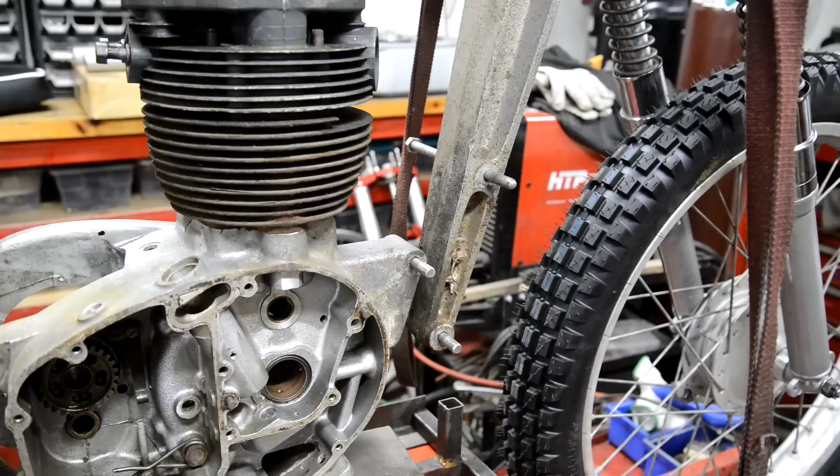So as you know, the bottom ends, cases and everything on the unit singles are all the same size - 250, 350, 441, 500. So what I've done is I've looked at Jensen's 250, which is still in at least the cradle part of the BSA frame, modified. So where they put that engine to get it all nice and centered, hopefully reasonable for the weight, is this side of the front mounting is half an inch from the center line. Nearest - I mean, it's difficult to get center line on a round tube with a bike that's all built up, but as far as I can tell, it's half an inch.

So what we're going to do is, that actually needs to come across this way, which is going to make that chain line worse. Bugger. So I'll make sure, because there's a nice casting mark more or less exactly down the centre here - they must have cast this in two halves. Well, they would have done, yeah, because of the shape of it, releasing and all that sort of stuff. Things have got to be sloped in a casting. If you were to cast a cube, you couldn't just cast a cube, or it wouldn't come out. It has to have a slight - there's a name for it - a slight angle on it, so that when you pull it out, the bigger end comes out and the smaller end is following it.

In fact, let me do that. Let me measure it and find a bit of cardboard. Right, so I got my measurements made. The long side is 5 3/4. I know my hand's in the way, but I'll be helped. 5 3/4. Then from the top one on the frame down to the one on the engine is 3 3/4.

Go the right way, Michael. Okay, so draw that, and then from that one to the one at the bottom is 2 7/8.

There we go. So right there is the mounting on the engine. So let me go and punch these three out, and actually I'll be honest with you, I've already punched them.

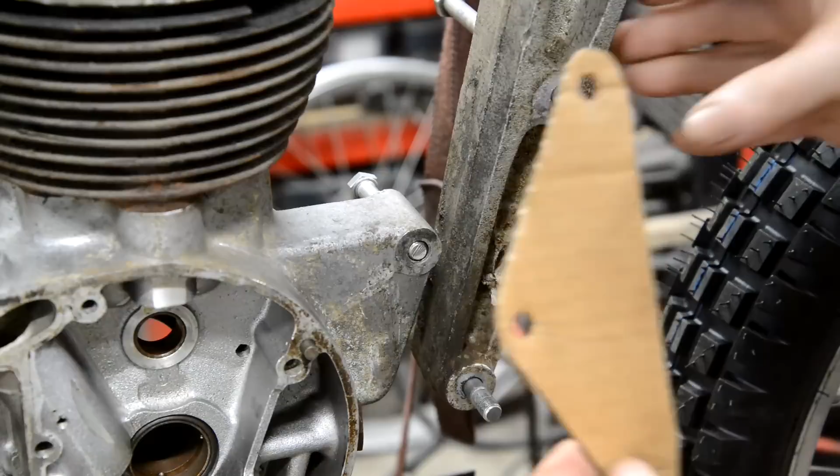Right, so that goes on there, that goes on there, and hopefully that goes there.

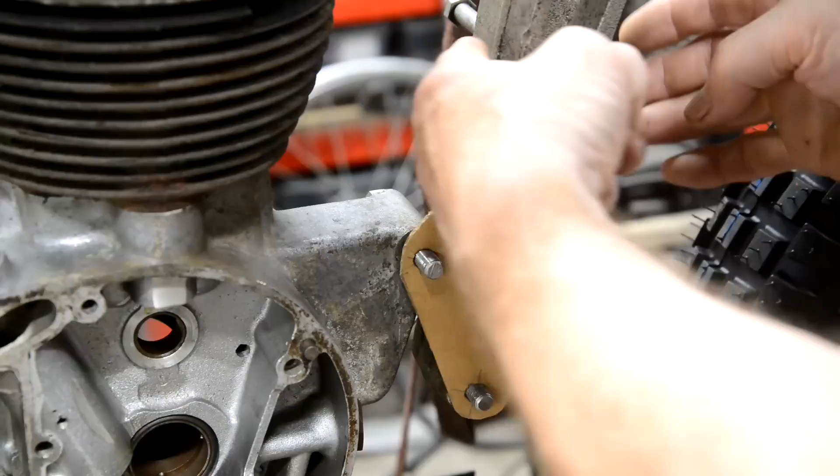So now we'll transfer this to a couple of plates of alloy, cut them out, then we'll put the engine where we want it to be and make some spacers, because don't forget, here is wider than there. Actually, I should have the original spacer for that somewhere - it'll be in the little box of Greeves things, because when I press that flat, that's going to be out a bit at the bottom here, so we're going to have a reasonable size spacer to go in there.

And as I say, I think, let me pull you out. There's enough room here that the bottom and the back can be fixed. I can lift that up, pull it forward slightly, and it'll come out easily, rather than trying to go to all this bother at the back.

Right, so let me go and find some. Oh, have I got any 1/4 inch alloy plate? I'd like to use 1/4 inch. I know I've got 3/16. Let me go and have a look. Let me go and cut 2 plates, and then we'll see about marking this up to get this back one in. Then we're going to make sure we're going to keep the engine straight.

So what I can do then is put a straight edge across this case and measure into the centre line on both sides, and I'll show you how I'm going to mark the centre line on a round piece of tube in a minute.

Now I'm going to move you around so you can see how I'll do the mark on the back tube. Now actually this is a 3-handed job, but I can at least show you how I'm going to do it.

Alright, so how do you get a measurement in the centre? Even if you use a pair of calipers, you don't know if you've come round slightly one way or the other. So what we're going to do is, this tube of course is one piece, so we're lucky here - that's exactly the same diameter as that. So if we put a straight edge across, or if I do it that way for you to see, we know that this edge here is exactly on the outside of that tube. So that's what I want to do this side.

I can then measure across there, mark my 3/4 inch, just move this, do the same there, mark my 3/4 inch, and then draw a line. As I say, I'm going to be a bit cack-handed doing this - I might have to tape it up or something, so let me do that.

Well, things are looking a little better. Got that 1/2 inch over from that line. Put my straight edge across the cases, measured from there to the straight edge - that engine is exactly straight in the frame.

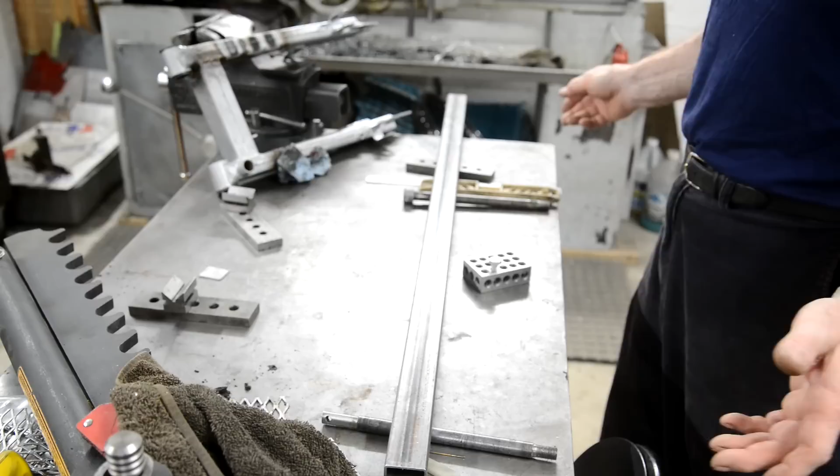Alright, the world is winding me up. My metal supply doesn't have any quarter inch alloy, 6061. So I'll order it from McMaster this afternoon and it'll be here tomorrow afternoon. And I don't want to start on the swinging arm because I want to know whether... anyway, everything is coming together to be a complete pain.

Right, so what I'm going to do is I'm going to start cutting all the pieces to make the swinging arm. And what I'm going to do is I'm going to take these suspension mounts off here and these fork ends off and use them. That will at least save us a little bit of time.

As I said, this is what I used for the Enfield swinging arm, which is a lot bigger, heavier bike than this is going to be, and that was held up for what - a year and a half. It's been ridden a lot. So let me take some measurements off this one, start cutting this. I'll decide how I'm going to do that.

So I've got to make some measurements. Then I'll order the alloy and I'll see about some tube and stuff for that. Okay, so let me get stuck in measuring, and we'll just do what we can when we can.

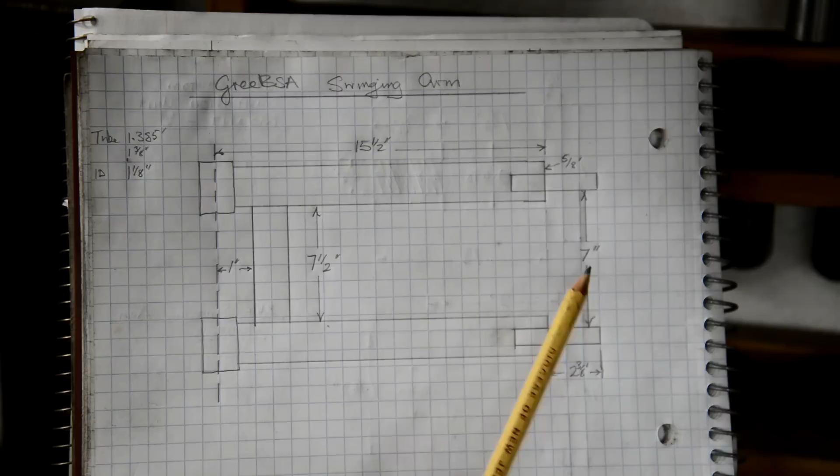So there's a drawing of the swinging arm, and no, your eyes do not deceive you - that wider measurement does say 7 and that does say 7.5. I'll explain why in a second. Anyway, the really important thing is these are parallel.

On the Greeves swinging arm, I went and measured the other one because there's nothing wrong with that, and they are parallel. So that is 9 inches wide on the Greeves one.

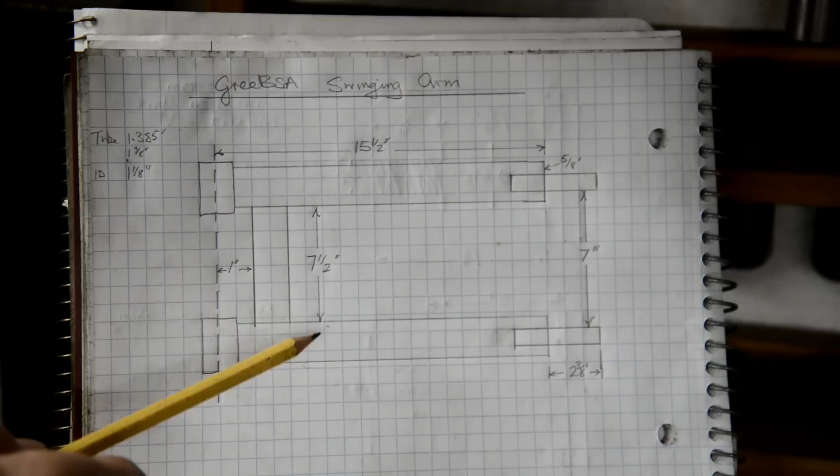This is wider than the material I'm going to use, so I'm going to use 3/4 inch there. As I say, I've used it before, so don't worry about it - 1.5 by 3/4. So if that's 9 inches, 2 times 3/4 of 1.5, 1.5 of 9 is 7.5.

The distance between the forks on the Greeves is 7 inches. But of course, as I say, this is an inch, something like that, 1.1 inches, so that would get that down to just below 7. These are barely inside of this. Alright, but as I say, the important thing is the parallel.

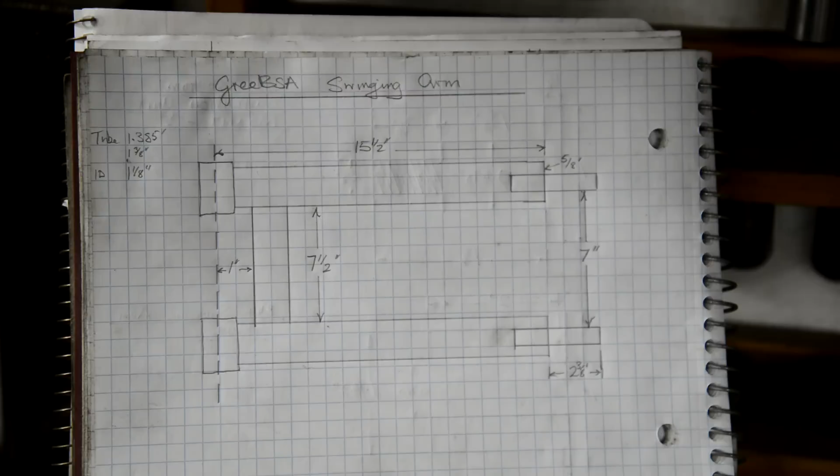So we're going to make this out of 1.5 inches by 3/4. We're going to cut them out of the existing swinging arm and just use them. So I've just measured how long they go in, from the center of the pivot to the end of the actual arm. It's 15.5 inches.

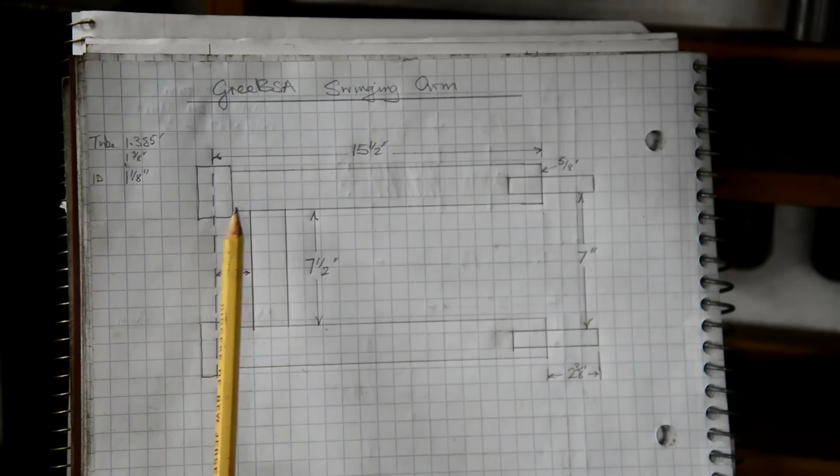This is basically 1 3/8 inch 1/8 inch wall, and I've got some 1 3/8 inch 1/8 inch wall tube. So I've got that, I've got this - that is inch by inch, or 1 inch square box section. I have some of that as well. So I've got everything I need to make this relatively quickly.

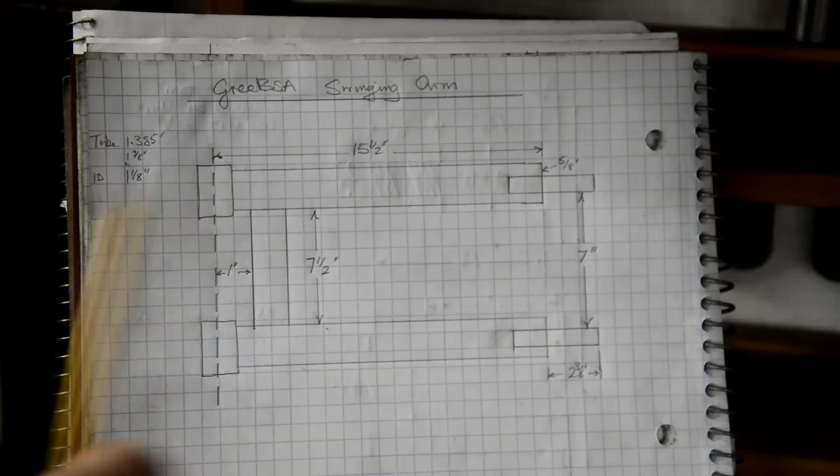So this might turn out to be this week's project actually. I think I'm going to trundle down and order the alloy plate, but also trundle down to Mike's first thing in the morning, pick up that other wheel, see if it's a better wheel. And if it doesn't need anything doing to it, I can actually put the tire and tube on. But that all depends on how things are, whether I decide I need to move the wheel about inside there. But as I say, the big thing is they're parallel.

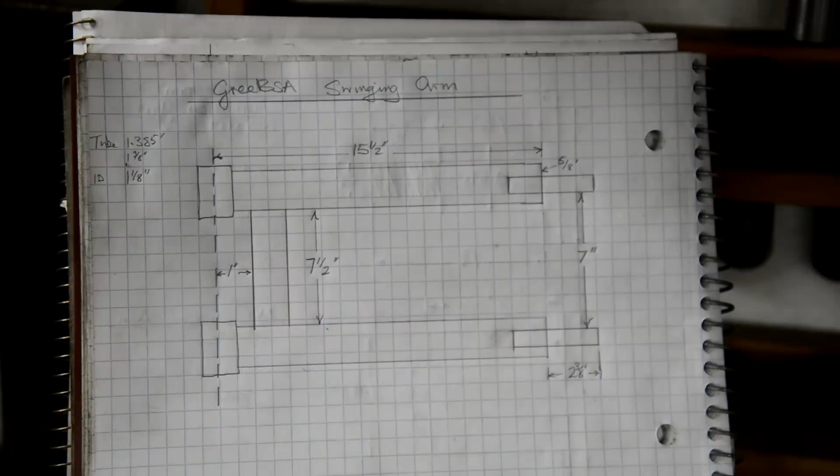I don't have to start worrying about angles - the angle that this goes up to that tube, and if that bends out like that, then they need to be at an angle. So everything can be made quite easily. So let me start sawing some box section, or as they call it here, square tube, even when it's not square, such as these are.

Alright, new day and a new job. It's done nothing but rain since I spoke to you yesterday.

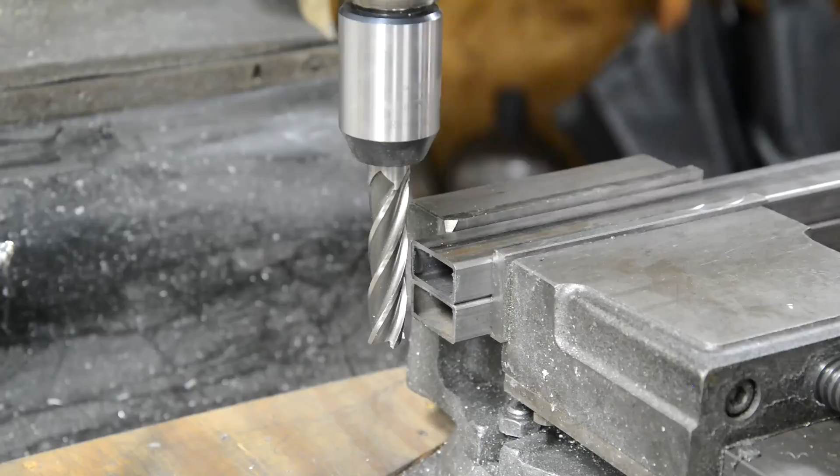Okay, I've cut my 2 pieces just slightly longer than whatever it was I wanted - 15, where did I say it was - 15.5 inches, hopefully. A bit much if I screwed up before we even got started. Yeah, it's 15 and 5/8.

So what we're going to do is mill the end, turn it round and mill the other end so these are absolutely the same length. Then the next step will be, while it's still in here like this, a 1.5 inch hole saw.

To put the cope into that for the piece of round tube. Oh, and speaking of the round tube for there, just a moment ago before I switched you on, I was able to get those out of there. Well, the heat affected that there, look - not much. So at least I don't have to make those up.

Although what I might do is cut that to be the same size as that and might as well get them centered properly. Alright, so let me just run this across the end of here.

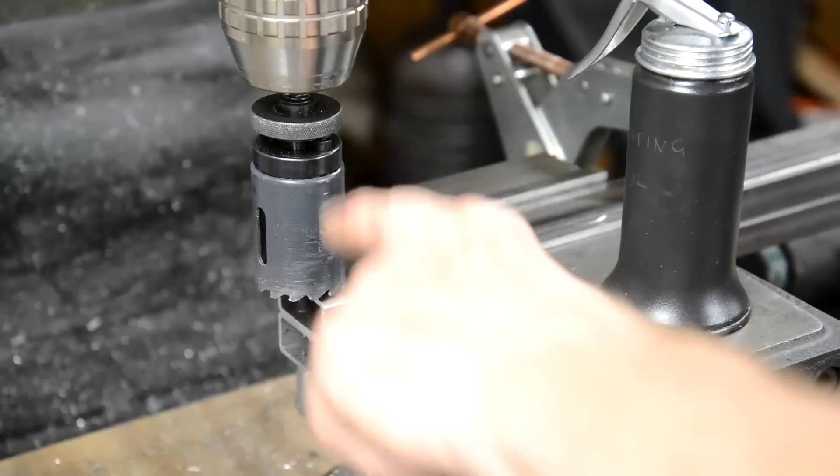So I need to buy a new one of these. It's a bit blunt, so we will take it slow and with plenty of lube. I had that clamped as well, by the way, so it didn't move. So let's see.

And I took the drill bit out so I could get centre.

I thought that was the thing that broke off. It's the piece we've cut out. Oh, that was nasty for a minute.

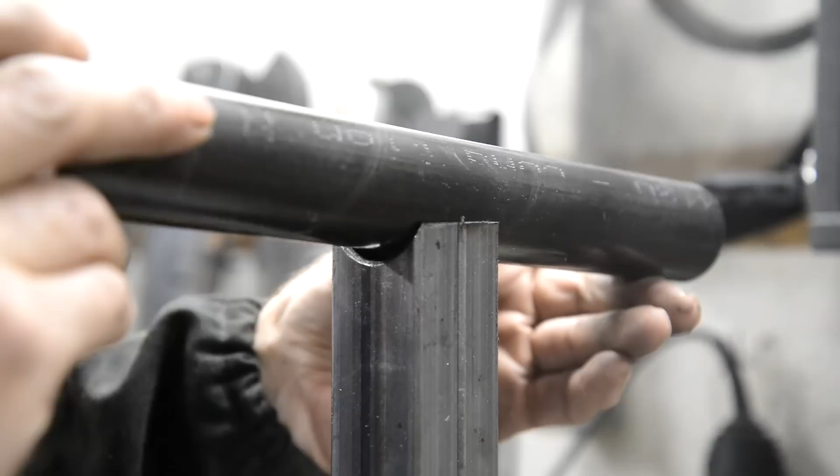Needs very slightly massaging to get that to go down in there. I suppose that's the problem with using just an ordinary hole saw - it's not going to be exactly right. In fact, I've got to measure this. Maybe this isn't exactly 1.5 inches. Turn that a little bit.

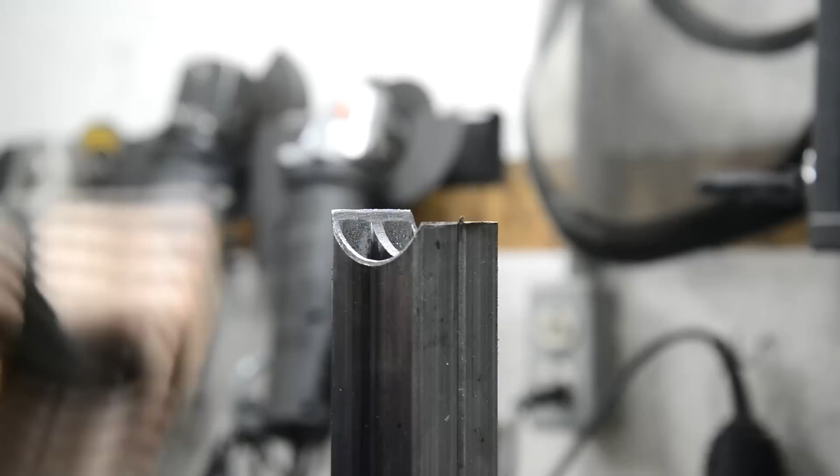Anyway, the next thing I'm going to do, hold on, is I'm going to cut these out of here. While I've got the thing over here, I'll cut the suspension mounts off as well.

And these are 3/16 for some reason. Why they didn't make them 1/4 inch, I don't know. So I'm going to have to fiddle on a little bit to do the slots. I think the 3/16. Yes, they are.

Okay, so let me get these out and then we'll set up with the new arms to mill these slots in.

Now that's all those pieces cut off. They were bronzed on. I've got to get all that bronze off. These are welded in, and look, they're not even solid plates. And the other thing, they look nasty.

When I cut through the end, a load of black water came out. So they still had water in, and I had a little look up inside. They look horrible. So yeah, should never have tried to salvage it.

Okay, so these, as I say, have all got to be sanded. I couldn't get that - I'll be able to get that out now probably, the adjuster Allen bolt out that the little snail cam snubs up to. And as I say, they'll have to be sanded off, get all that bronze off so the new bronze will take well.

Alright, let me set up now to do the slots for these.

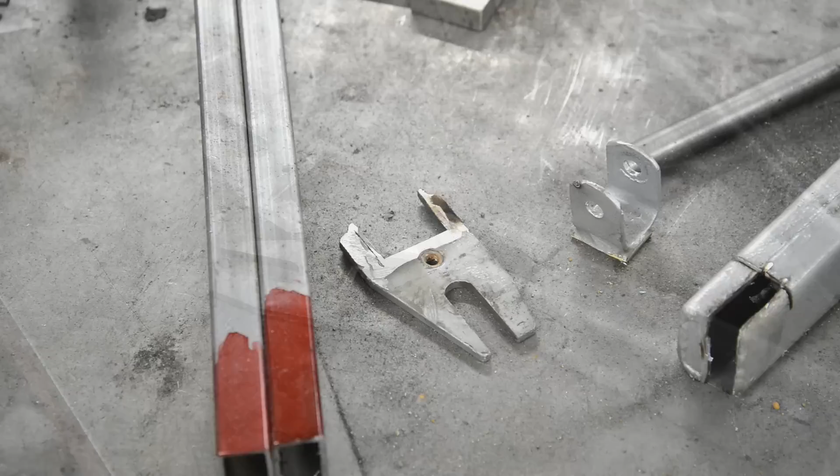Alright, own up. Who's got my calipers? Okay, I've been working to get them cleaned up. Put some stuff on there so I can mark it, and now I can't find my calipers to do the measurements and the marking. Plus, there's a Ronnie Dio song,

Can't remember which one it is. Some of the words are, it's like broken glass, you get cut before you see it.

And before I had a chance to sand the ends of those, I cut my thumb.

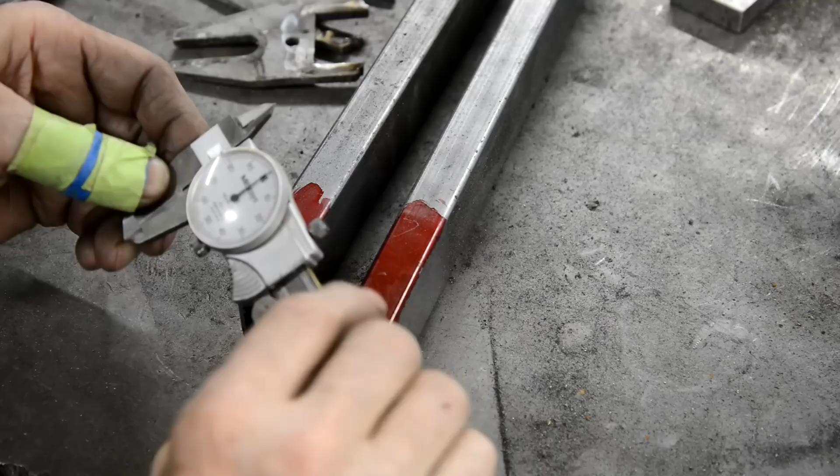Alright, let me keep looking for the calipers. Right, well, that's amazing. I can't find them anywhere. So we're going to have to do a phrase I hate - we're going to have to go old school. Not too bad. At least it's not a vernier. So I've got these, a nice Mitutoyo.

Okay, so let's get an averagey sort of reading. About 92, 0.192, 3/16 as I say.

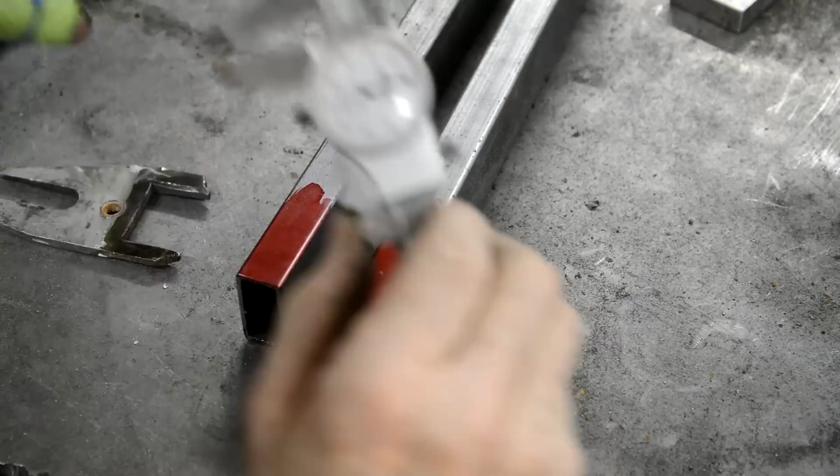These are slightly bent, you know. Yeah, 0.190. That needs sanding down a little bit. Yeah, 190, 192. Alright, so I'm going to measure these and then we'll mark them to put that thickness in the center. Alright, so let me do that.

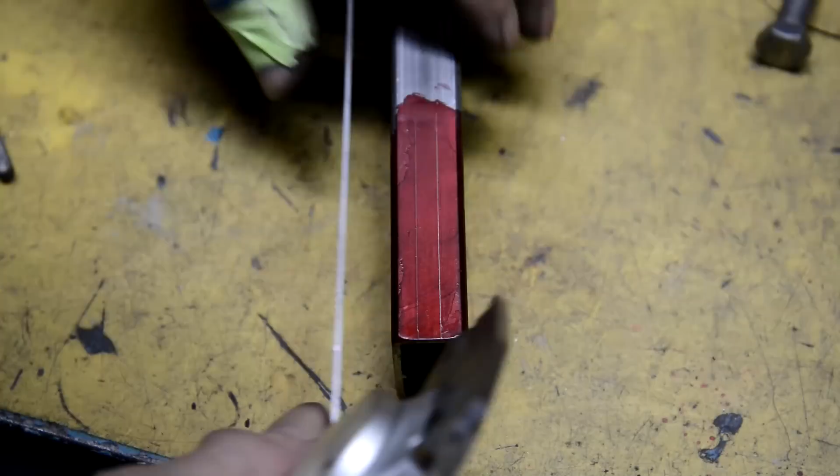Right, I've got my markings on. I actually had to do them twice because with this having a curved edge, to get a face to run this along, it pulled this around. So when I actually measured the gap in the middle, it was too big. So what I did was, I put that there like that to give myself a nice flat surface. Added the thickness of that to my measurement and used that to go along. Okay.

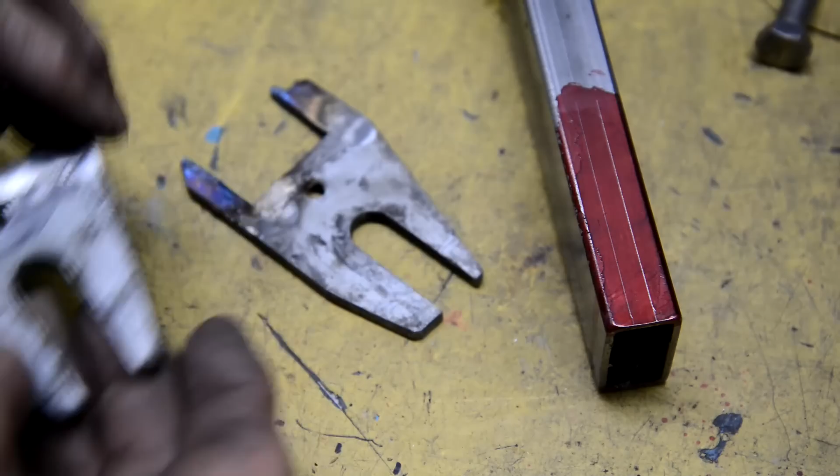So there I was, pleased with that. You know, I thought, wow, actually got it accurate. And then look at this. These two are completely bloody different. It doesn't matter which way I put them. Look. All over the place.

So we're going to have to fix up something to hold these, because I can't just drop one in there and drop one in there and say okay that's it. Because they're going to be different - the slot for that is going to be different on the two sides.

Alright, anyway that's a problem for after lunch. And actually the UPS man has just been with my 1/4 inch alloy. So just to cheer us up a bit, I might cut that and drill it this afternoon. We'll see.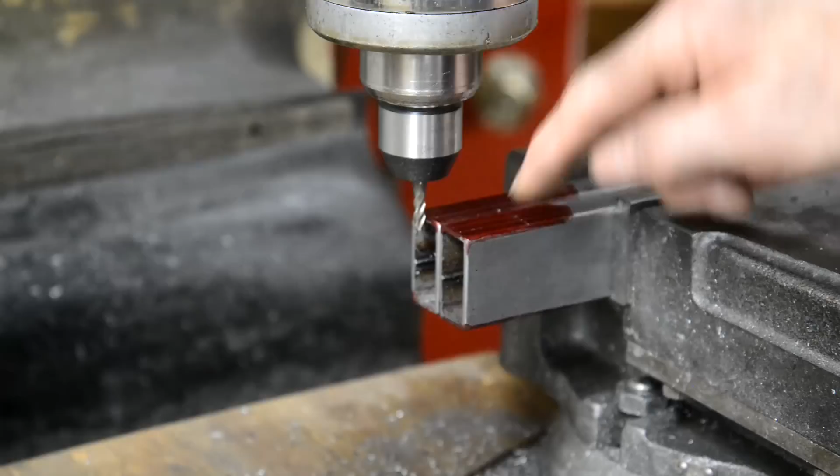Right, so here we are set up to do the first slot. I'm going to do 2 slots. I've got the DRO set to 0, as far as I want to go, so I can just go back. This is why it would have been nice if the plate was 1/4 - I could have just put a 1/4 inch end mill in and done the job easily, but of course I don't have that, well it isn't even really 3/16, so I got it marked. This is a 5/32, so that's 2 5/16. So let's see if we can do this without breaking the end mill.

I hate using small end mills. So it'll take me forever. If I knew what I was doing, I'd know how fast a feed I could use.

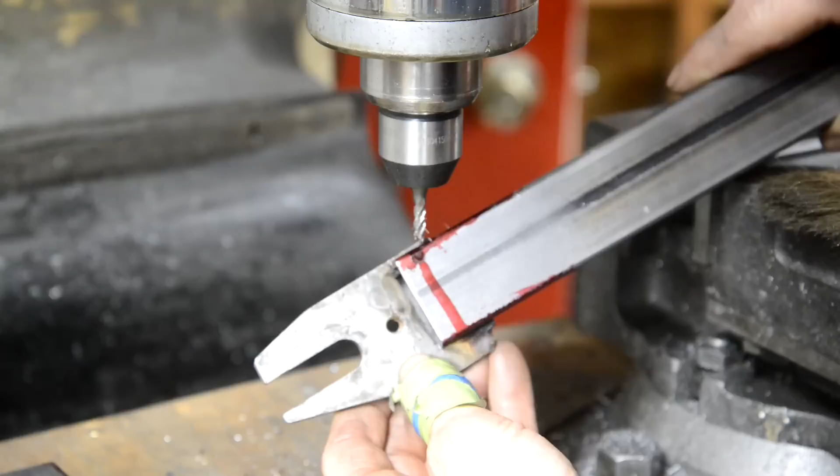Right, so I'll make sure to get these in shot. That's those done. Alright, and these fit in there, just nicely. There we go, see? Okay, cross section, or cross member I should say.

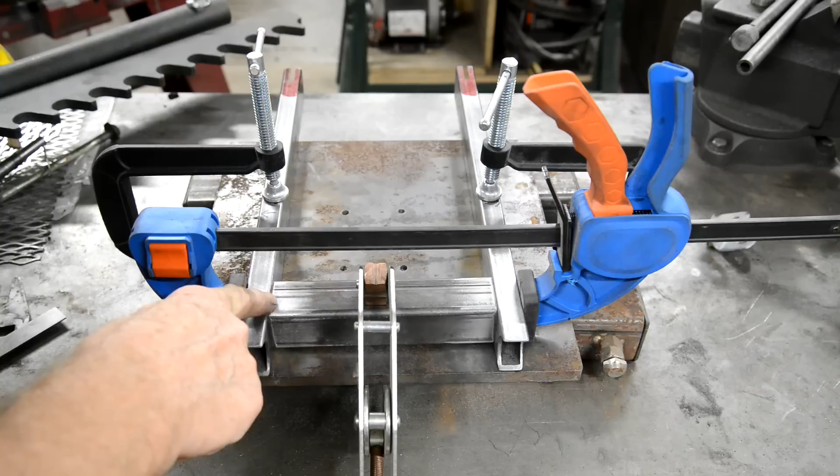Right, so I've cut my 1.5 inch square tube, put them in the mill and squared the ends off. That is just over 6.5 inches, which gives me my 7 inches between the plates. When I was tidying up the basement a couple of weeks ago, I found 3 plates like this, 1/2 inch thick steel, 12 by 12. So that is really nice.

So I've got these clamped down, that clamped tight, that clamped down, so I don't think anything can move, and everything is nice and square. So I'm going to do lots and lots of tacks.

Should I weld this or should I bronze it? On the Greeves, everything was bronzed. Yeah, that was bronzed - everything was bronzed except these. They were welded in.

Alright, got the swinging arm all bronzed up. I slipped up slightly, even with all those clamps - I should have had an 8 inch piece, or whatever it is, 6.5 inch piece, in between the other ends, because it pinched in slightly. But I put the jack in and it hadn't come in much, and I've got it back to being 8 inches across there, both ends, and these are square.

So that's perfect. Alright, so I've turned up these 2 pieces, which are the right size for the plastic bushes. I turned a little bit off the outside - they're now an absolutely perfect fit into those scallops.

Fortunately I made the bushes 1 1/8, so a piece of 1 1/8 tube. Whew. I was hoping, well not hoping, I was planning to do it with a piece of alloy, because a solid bar of alloy would have sucked all the heat out of this as I was bronzing it. But anyway, that will at least keep it in line.

I'm going to put a couple of clamps on. We'll measure from here down to the bottom to make sure everything's still absolutely right, and then we'll bronze this up.

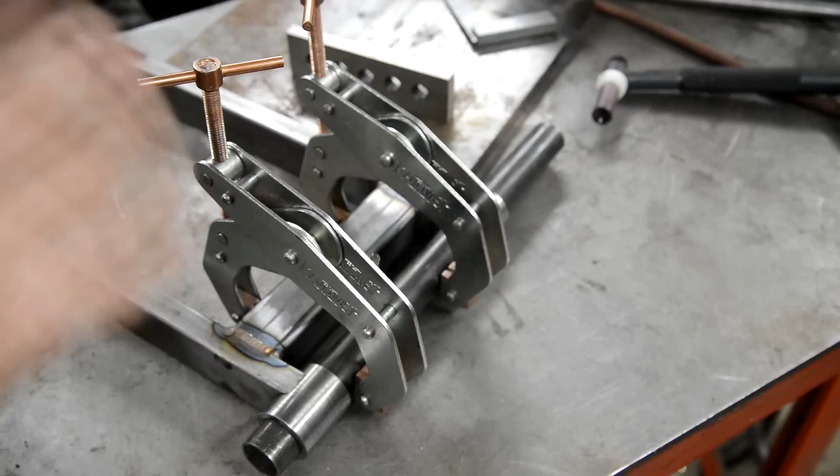There it is, clamped up, ready to bronze. I've measured from here to the bottom on each side, 15 and 1/16, both of them identical. Really easy to check - it's perfectly square there. Perfectly square there.

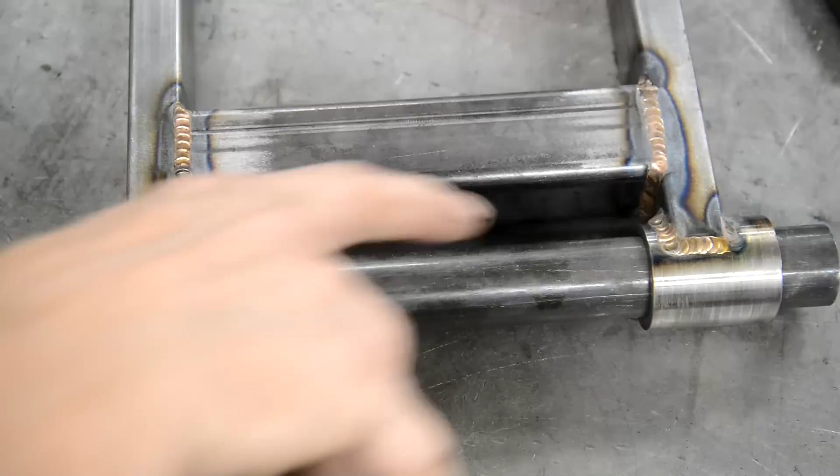See if I can get it right this time. So there it is, all bronzed up - well, all bar a little bit in there and in there. I keep meaning to buy one of those, what is it, about number 12, the really big cups, so that I can get a huge amount of cover with the argon. Because the couple of professional type welders that I watch on YouTube, when they've got a number 12 cup on, they can have an inch stick out, and then I could get in there easily.

Right, so let me get this to cool down a bit, and then importantly, see if we can get this rod out. I've just measured everything - nothing seems to have changed, so come back in a moment.

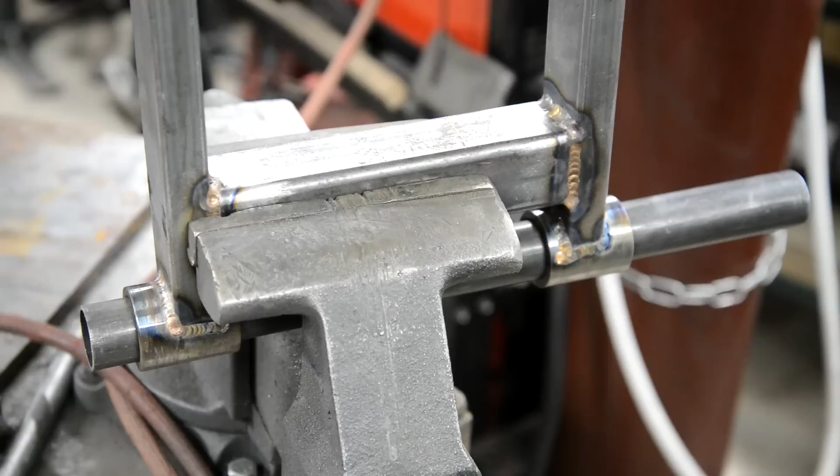So now for the big test. If you can hear beeping in the background, it's the power company - they're just finishing off moving the cables to the new pole. It's tight.

Got a feeling you didn't see half of that, but can't be helped when I'm concentrating. Alright, so there it is. As I say, I think now

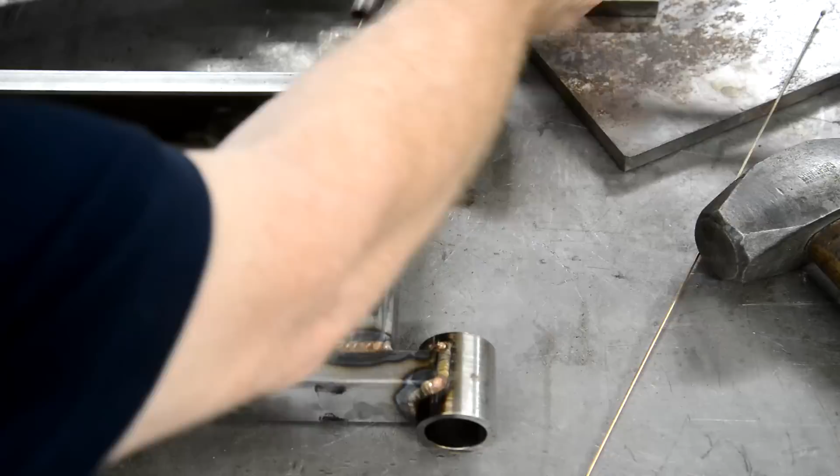might just leave that until I can get a bigger one. That means I can't put the bushes in. I'll see what I can do with that. Let's hang on, let me open you out completely.

Oh dear, there I go again. Okay.

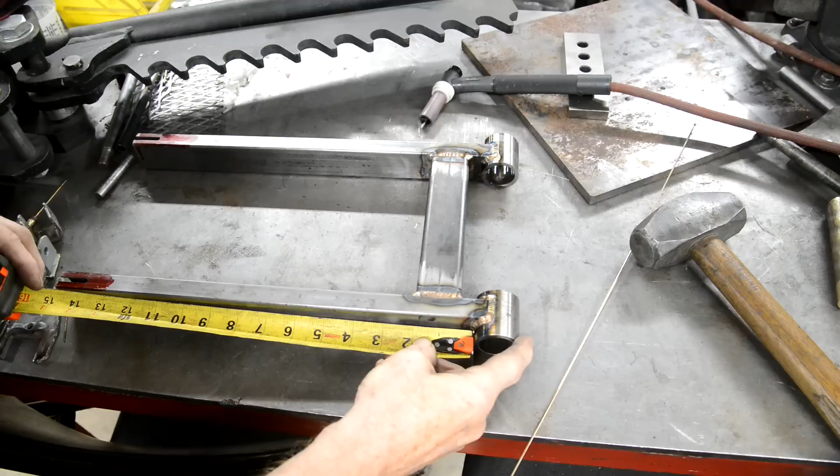Well, it's between 13/16 and 7/8. Between 13/16 and 7/8.

8 1/16, 8 1/16, and oh, there is a spare fractional rock from corner to corner there. We can deal with that.

Actually, that could be the bronze because these aren't perfectly flat. I've got to put a piece in there. So hey,

next thing's to put these in and then put those on. I might put those on a bit further up.

See, if I do that, I get the wheel will - you've got to think of this in reverse. The wheel will actually go down from the position of the top suspension mount, and every little helps to kick us forward without having huge rear suspension.

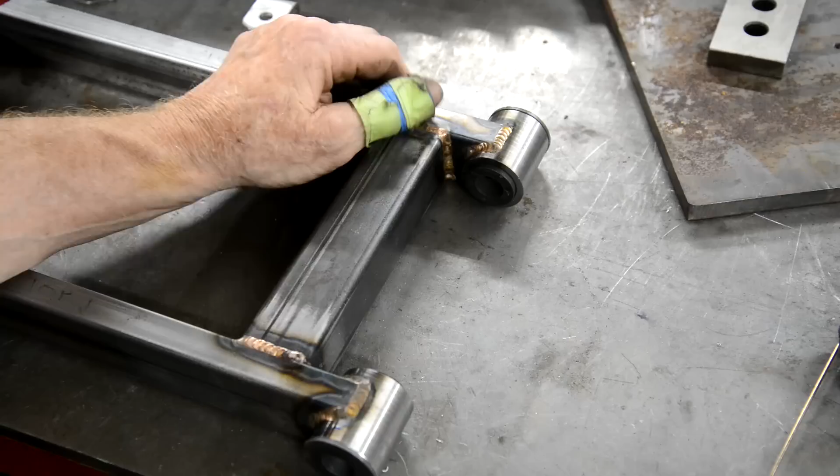So fortunately, because everything is square, I put it in the mill and I just milled off the 80 thou that they are. But now here is, and this time, again to be honest, I haven't tried this, so you could hear me go berserk, but let's see what happens.

Nice fit. Oh, well, look at that. Okay,

let's get this clamped down on our plate. Might have clamped this on the table actually, and then we'll, oh, I'll tell you something about what I've got in frame.

Okay, you remember how these really haven't been cut the same size. Okay, what I have found is that if you fit that like that, hang on, I haven't really gone anywhere. There we go, that'll work.

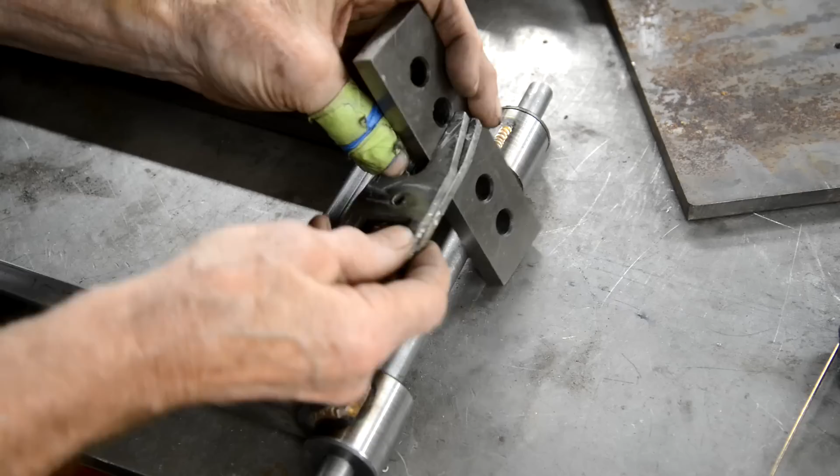That's 1/2 inch, so that fits into there nicely. Then you'll notice, look, that those edges are right. So the rest of the shape is wrong. You know, they didn't make them the same shape.

But that edge and that edge are parallel with these edges. So I can put them down like that and know that they'll be all right. Okay, so let me see about setting all this up.

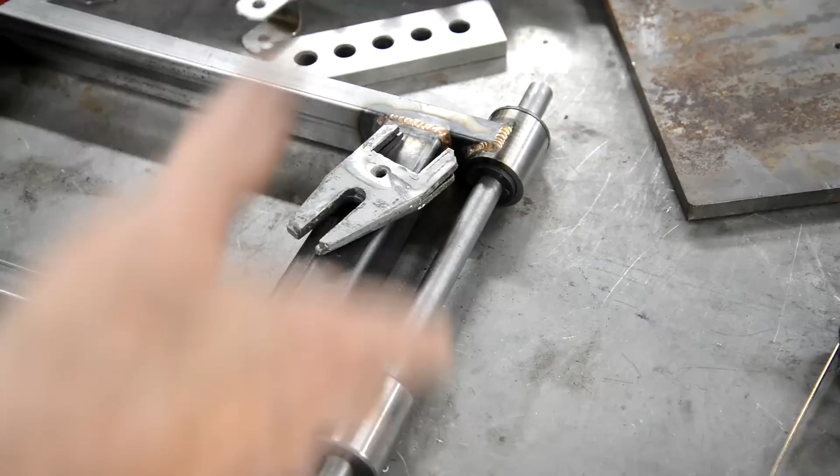All right, we've got that down on the plates. What I've done is put some heavy weights on the actual swinging arm, then I've got these chocked to the right height so that they're level.

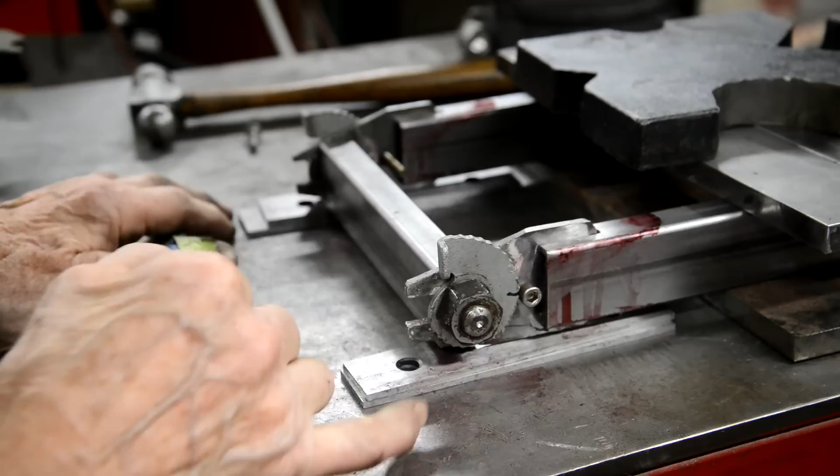I've put the adjusters on, set the adjusters on both sides to be the same, and also before I put the actual wheel spindle in, I put it in the lathe and put a centre on both sides. I've measured from the pivot spindle to here on both sides, that's identical. These are set up identically.

They're down tight on their flat surfaces, and this piece is 7 inches exactly with the ends squared off, so even if there's any minor bits in the plates, the ends of the forks are exactly square to each other.

I can't think of anything else that I could do, so I think what I'm going to do is put a little spot on either side there and then turn it over and do the same on the other.

Because I've got a feeling, funnily enough, Steam Shop, when he went to college, did welding technology, and we were talking about things twisting. He was mentioning how the way for it not to twist is to come up with your welding operations in the right sequence, so knowing you're going to get a tweak on one side when it cools, you don't do it all on one side - you do that bit, then do the next piece where it would be the exact opposite tweak when that cooled, and that way you supposedly keep them right.

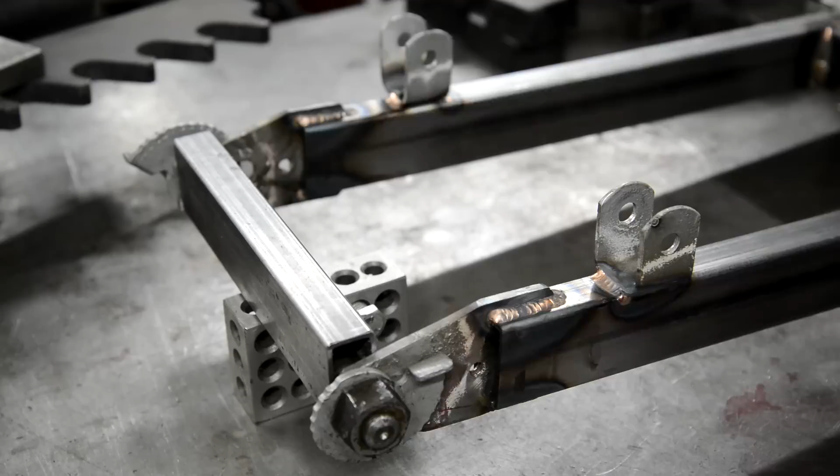I've got to fill in the ends there, and these I've welded front and back and underneath here, both sides. So as you can see, I need to do a bit of bronze there, fill those ends in, and that's that.

That's all I'm going to get done this week. Let's go and put it on the bike just to make sure it does fit, so let's see how much confidence I've got in my work.

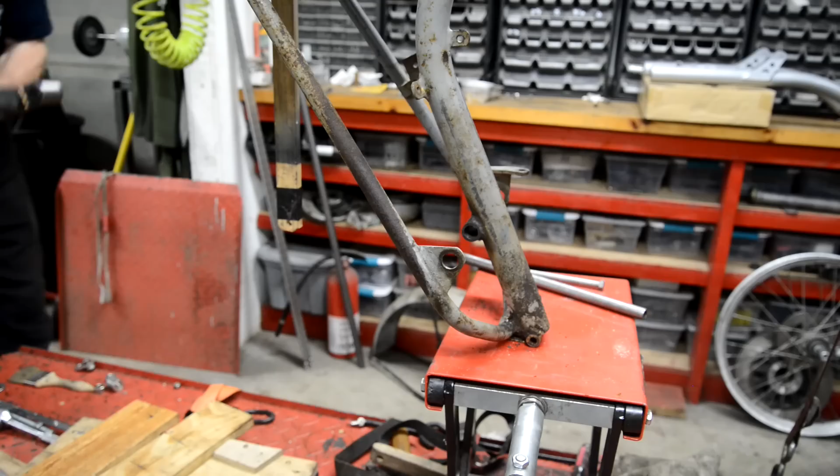I've got to take that thing off so I can... how the hell do I get this in here? How did I put it in before? Ah, from the... get it in like there. Stop slipping down. There, there.

Oh goodness gracious me, and that is going to go up. Now these are slightly inwards because the swinging arm is a bit narrower. Because the arms are narrower, the other arms were wider so they were able to mount these further out, but we've got plenty of room to move the upper ones in a bit - is the top showing there?

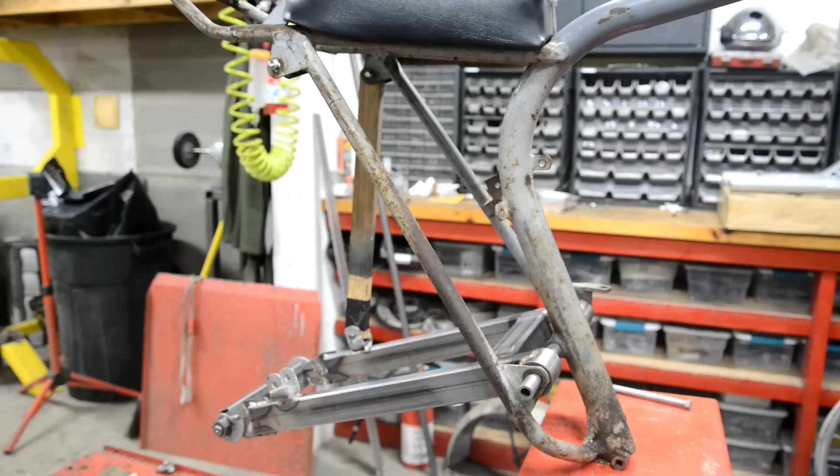I wanted to know where the front end of the saddle went to, because I'm thinking of lopping a piece out of this, but of course the saddle mounts onto... hang about, hold on again.

I bet you're out of focus there, aren't you? Hang on. There, I didn't want you to be too out of focus.

Alright, so this is colossal, it's really too tall, so I'm thinking of whipping a couple of inches out of that. Now of course that will not only bring it down, it'll bring it forward. And this saddle has a centre bolt which goes in there, and it sits on that at the back.

So we'll have to think about that. But that swinging arm's not too bad, is it? Should have done that in the first place, shouldn't I? Oh well, never mind.

What was it? It Ain't Half Hot Mum. Sergeant Major... oh dear, I can't remember his name. Windsor Davies. One of his little phrases was, oh dear, something, something, never mind.